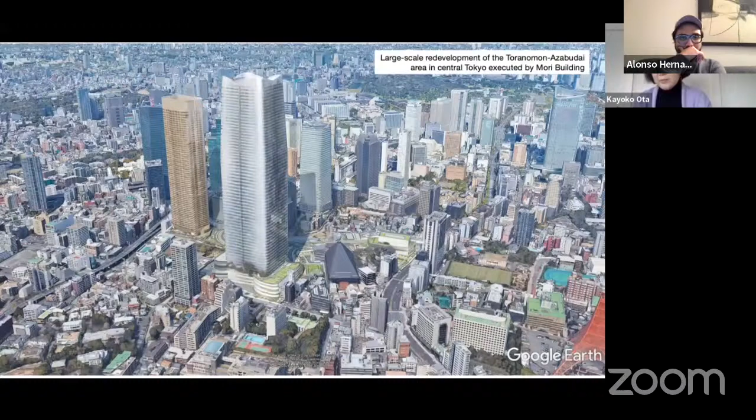Since around the time of the bubble economy in the late 1980s to the 1990s, urban planning and development has increasingly been delegated by the government to private developers. And now the market for urban development is largely dominated by a handful of developers.

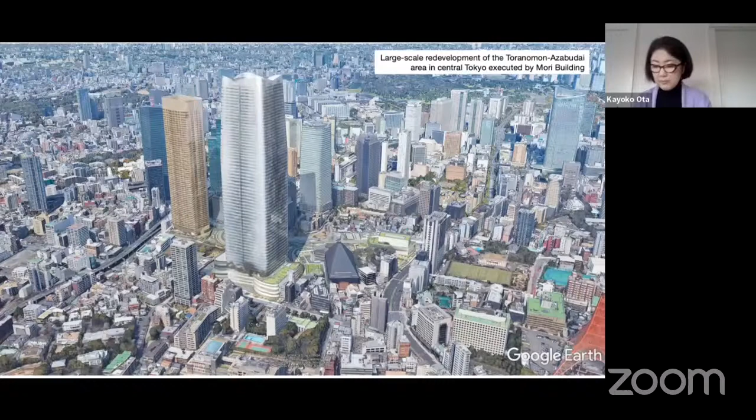The situation in the post-war period, some 60 years ago, was different. Young architects at the time, like Kiyonori Kikutake, as you're looking at his work back in 1958, asserted their own vision for things to come, addressing the whole society as a member of Metabolism. This is another member of Metabolism.

This is another member of Metabolism, Kisho Kurokawa, who made a proposal for Agricultural City. Although it looks like a visionary project, it was a serious attempt to regenerate his hometown in Aichi, which is in between Tokyo and Osaka, after the whole village was damaged by a major typhoon in 1959.

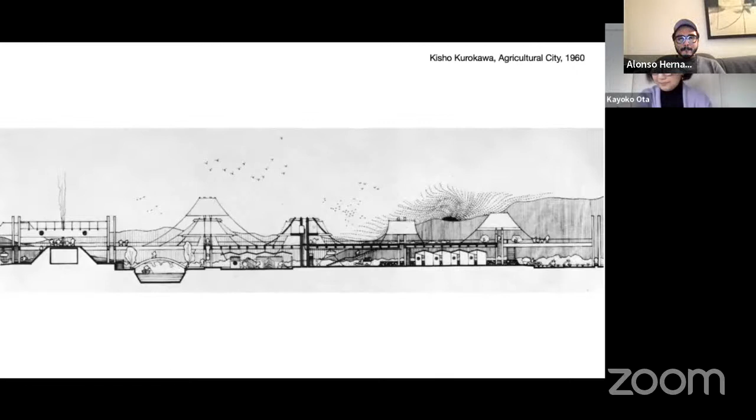Or Kenzo Tange presented a future plan for Tokyo, on how the city, in the imminent crisis of population burst, could change and reform itself. It was presented to the public, and it was a comprehensive plan based on thorough research.

Some of the architects did manage to embody their vision or visionary plans, like Kikutake or Tange, but their achievements were eventually replaced with generic buildings, designed by large corporate firms as products or commodities. These are the result of calculation based on market formula, having very little to do with the specificity of the context or personal vision.

Typically, construction and especially urban development has been a major subject of this economic operation, which, for example, inflated the scale and height of buildings.

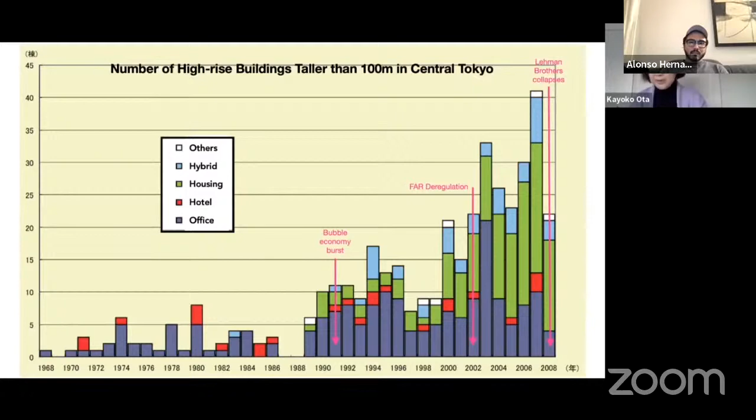For Tokyo, the national and local governments together have been encouraging renewal of several nodes into internationally competitive urban hubs, as marked with purple on this map.

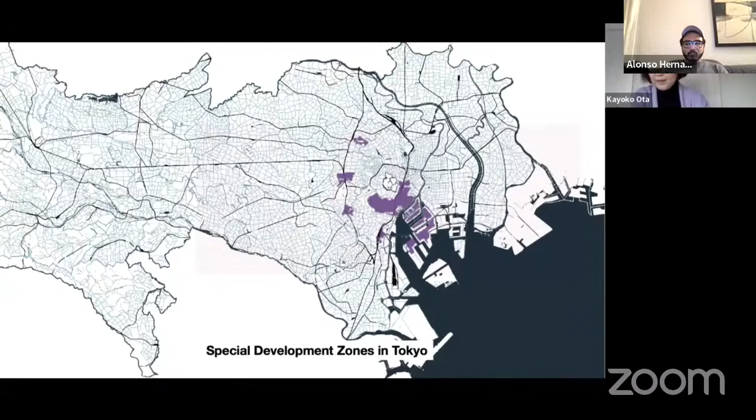But at the same time, the old urban fabric, marked in red, consistently surrounds the purple area on the periphery of the urban center. And this old urban fabric is facing an increasing risk of deterioration due to the physical weakness and density of timber structures, mostly built right after the Second World War, which is now being exacerbated by shrinking and aging of the population.

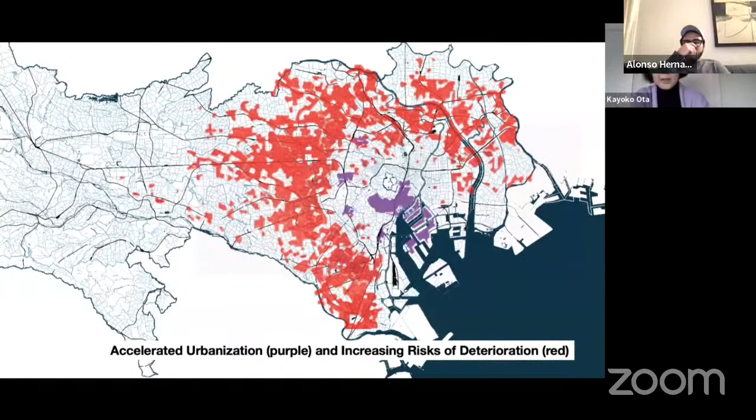Back in the days, it was for these areas that architects with small practice designed a house as an alternative model for living in a city. They also strived to make it an artistic representation of their intellectual thoughts.

This is a house designed by Toyo Ito, who was also very much influenced at the time by Kazuo Shinohara, as much as Sejima and Nishizawa. Such experimental works certainly push the limit of architecture, but whether or not they have much concern with how their work would or should relate with the surrounding condition is a separate issue.

Into the 21st century, there was a wake-up call. In the never-ending economic stagnation since the bubble burst, we were forced to face the demographic phenomena and its consequences and change our values. It was useless to think of the future in the way we did at the time of the Expo 70.

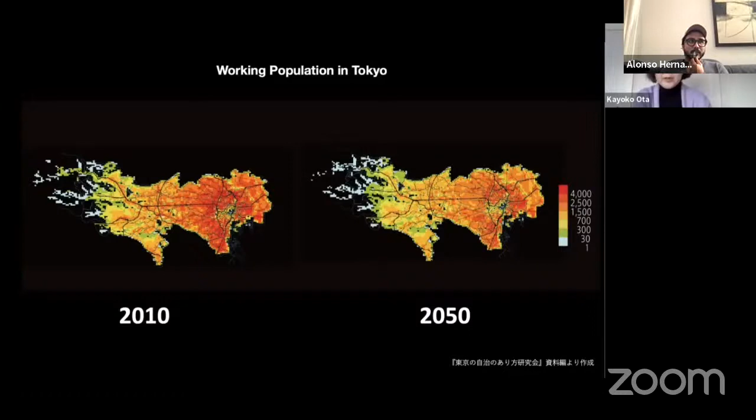The population of Tokyo is expected to start shrinking in 2025, and we also see less working population due to the population aging. We are also expecting the increase of old people living alone. And the number of houses being abandoned is increasing. This will be the game changer for housing design.

Now, many architects say that they had to redefine their profession after the great earthquake of Tohoku in 2011. This seemed to be a phenomenon specific to Japan, but as we see global warming causing unforeseen disasters all over the world, it no longer seems a local issue, nor the population aging or shrinking.

Having a mind shaken by the 2011 disaster, the architect's interest, especially in the younger generation, is shifting from creating works as author to engaging with society.

Here are some of the renovation works by the younger generation, which are designed as a pilot project or instigator of regenerating the neighborhood. Yoshihiko Oshima, who is the second person from the right on the left picture, leading a studio called Blue Studio, became a role model of young architects by bringing many projects of regenerating shrinking neighborhoods to a success. This family restaurant on the right...

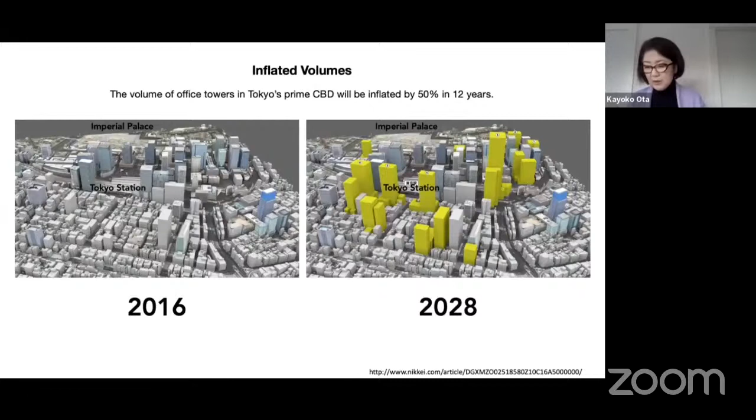Meanwhile, in the central part of Tokyo, like this place around the central station, which is a prime CBD, further inflation of space is taking place right now. So the development is very much in the hands of major developers, general contractors, and corporate design firms, which means that architects with small practice are almost completely excluded from the scene.

So now we have a situation where the small design practice is more and more marginalized in the market of urban development, while the profession's concern is leaning towards social challenges and engagement, which is great. But as a result, architectural design is becoming more pedestrian, mainly concerned with managing solutions in predictable manners. And I think this is a problem as well.

What I want to show you today is that new behaviors are emerging among architects, which might be a sign of turning point for the architecture profession altogether. They have high concern for social interaction, while also trying to expand the repertoire of architecture itself in a different way than their older generations did. The new breed treat architecture as a strategic urban intervention, although the result may seem more subtle.

Shibuya is one of several urban nodes of Tokyo and is now going under a massive redevelopment to become a business and entertainment hub. The complex project overarches several skyscrapers, a public plaza, pedestrian connectors, and so on, executed by a consortium led by a railway company, which also acts as the developer.

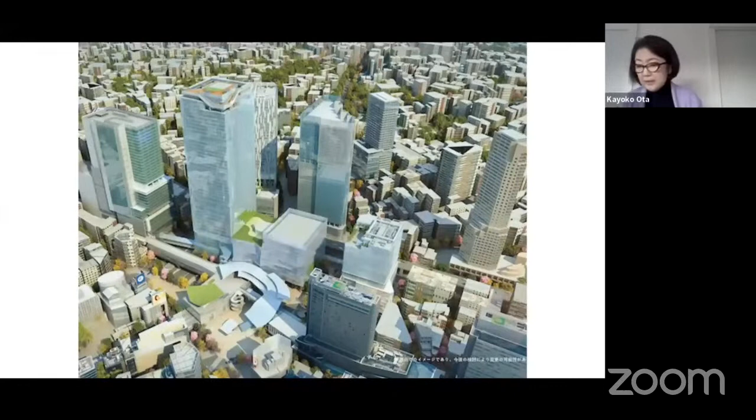These high-rise buildings look quite generic, of course, and the building that I'm going to talk about is no exception, which is this skyscraper called Shibuya Stream.

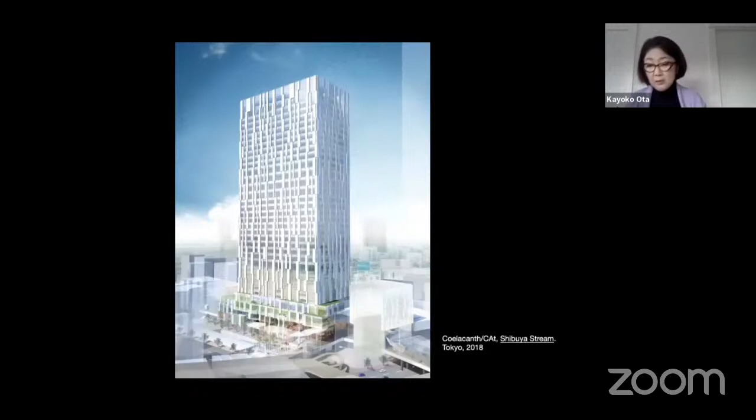And the architect studio Coelacanth made a remarkable evolution, however, inside the building. They focused their efforts on the lower portion of the building, from the ground level up to the 5th floor, because from the 6th floor up to the top of the building is entirely office floors rented out to Google Japan. And so this lower portion needed to have public passages and retail functions.

The architects managed to evolve the functionality of a skyscraper in two ways. One is that they enhanced the public use of the privately owned territory with a network of large voids penetrating through the lower portion in all directions. This network lets visitors coming from various directions for various purposes mix. This was done at the expense of sacrificing retail rent, but the client took a long-term evaluation of profit return. The second achievement is that they kept the end of all the void channels open, allowing users to have direct contact with the air and view outside.

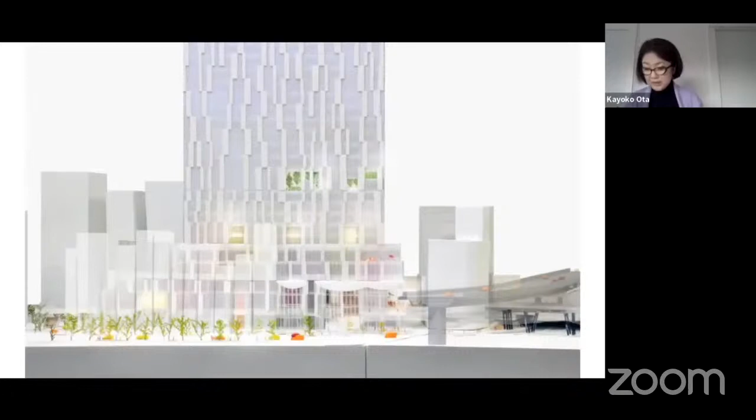Let's take a closer look. The lower portion of the skyscraper works as a connector of diverse urban elements surrounding the building: a major train station, a highway, a very busy urban road, and the canal. People enter the building and walk through it for various destinations, to be mixed in a dynamic urban space inside the skyscraper.

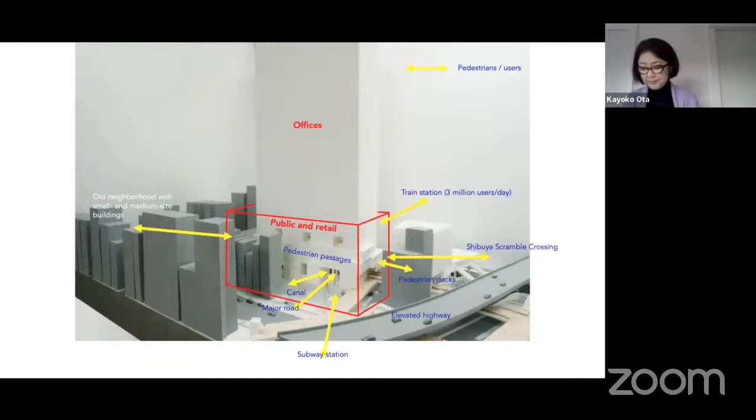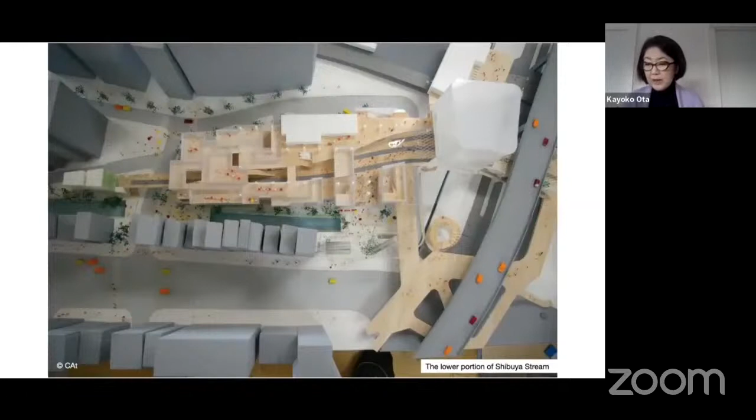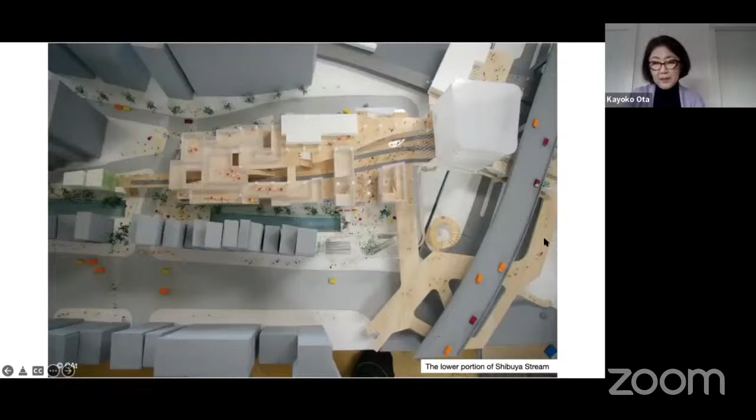You're now looking at the model of the lower portion of the building with the higher portion lifted up. You see a network of passages, hollow throughout. Here you see the elevated highway, a network of pedestrian deck which spreads under the highway, and then underneath this pedestrian network is the very busy urban road.

And this is the site, along a very tiny canal, which used to be buried under the ground to make more space for the last Olympics in 1964. On the other side of this site is the major station of Shibuya.

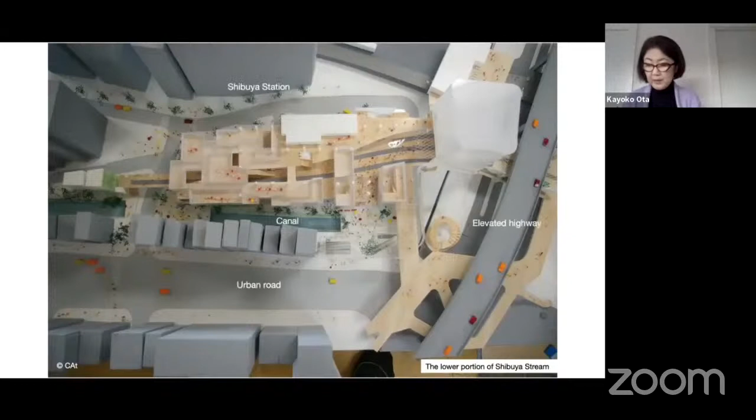This is the ground level and the canal, which was resuscitated for the development. And this is the very busy urban road. There is also a connection from the building to the subway station underneath with this urban connector, which the architects also designed.

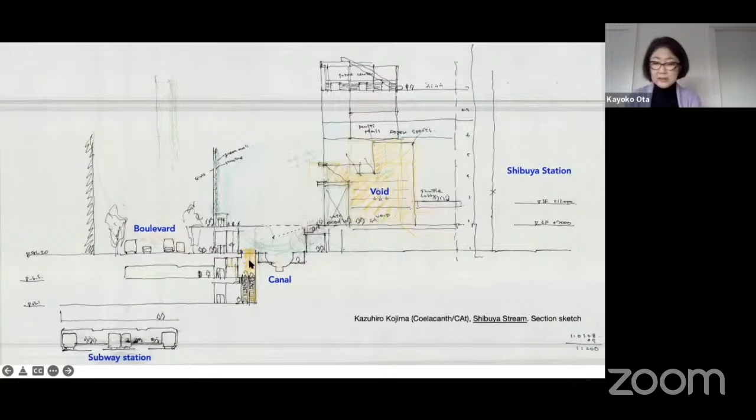So this is the outcome. The architects took advantage of the height differences of the surrounding elements on the site, which is at the very bottom of a valley—this geographic condition.

This is a model of holes made by the architect. It's a channel of voluminous voids which penetrates through the lower portion of the building. The void with the largest opening here works as the main entry to the building, which has no facade nor doors. An entire void network is open to the outside 24/7, as I mentioned.

So this is the big entry to the building, and there's no facade or door. And this is the large staircase. They also made a pedestrian road, the promenade along the canal, which were all created because it used to be occupied by an older building before.

By now, you must be wondering how a small architect studio like Coelacanth could do this all. They were able to join this project with the condition that they're assisted by a large design firm and work with urban planners and civil engineers outside through the entire process.

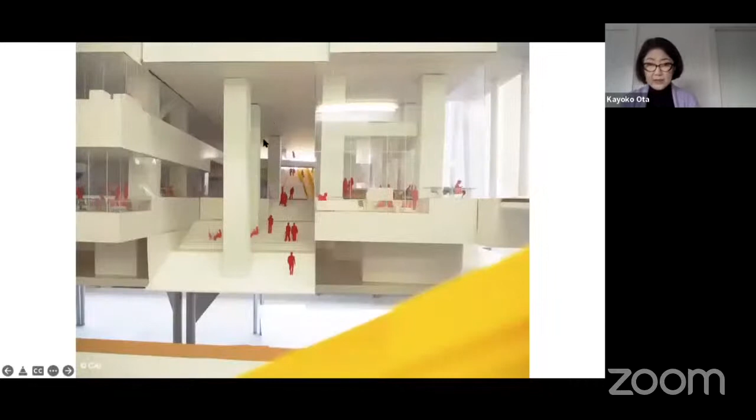One of the breakthroughs achieved by the team was the creation of this big staircase, made in a void, where they could get rid of large structural columns. As you can see here, these columns were very much there in the early model of the project. But thanks to intense negotiation and discussion with urban planners, they succeeded in getting rid of them, so that the void space can really function as a public gathering place.

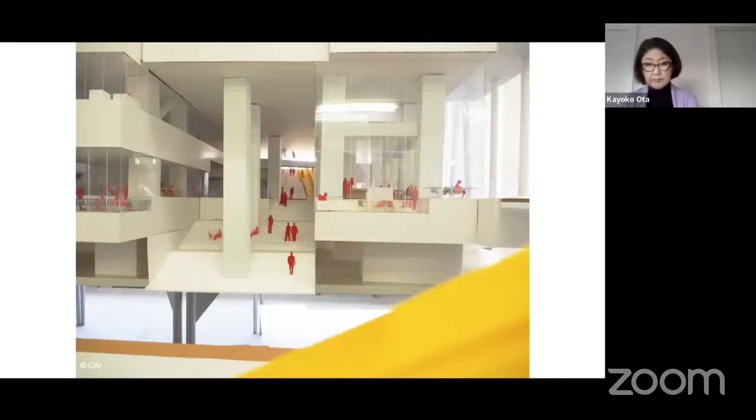The big staircases were working well as public space, like this one, until the outbreak of the pandemic. This space, and also the space in front, are occasionally used for public events, also now.

Now, ascending the stairway, you land on the main passage on the 3rd level. So now I'm going to talk about this main passage on the 3rd level. It's a big tunnel penetrating the long side of the building and stretching its arms in all directions on two levels. We are now on the main passage in the void channel. On a sunny day, it's quite bright here, feeling almost like being outside.

Wind and rain might blow in too, which is also nice. And escalators fly through large holes punched in the upper floors, like this, which allow both physical and visual interactions of various people: office workers, commuters, shoppers, hotel guests, theater goers, tourists, and people just hanging out, of course.

And maybe some of you think that, well, this reminds of a much earlier project by OMA, which was for the Euralille, I think, and also maybe a little bit like the National Library for Paris. But also the architects were very much influenced by Hiroshi Hara, who since the 1960s established the theory of holes or hollowness.

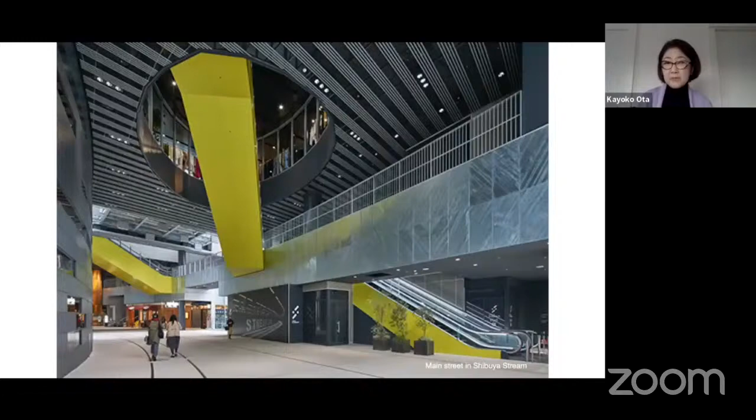Now, some part of the main passage has multiple floors, keeping the old railway track as a memory of the place, which are these metal lines going through the floor of the passage. And this main passage was carefully designed along the track line to create an informal atmosphere of an alley. So this is slightly curved instead of being straightforward, and lined with small restaurants and shops.

You see, this is the plan for the main passage, hand-drawn by the architect. The architect scripted details of how shops should be organized along the curved track line. They laid things out in such a way to give a less controlled feel and more sense of intimacy. So they encouraged the restaurants to spill out more and more into the main passage. And of course, someone had to negotiate with the authority to change the regulation.

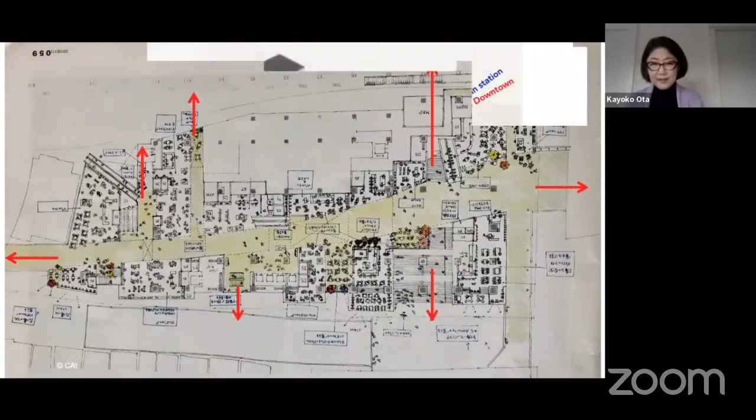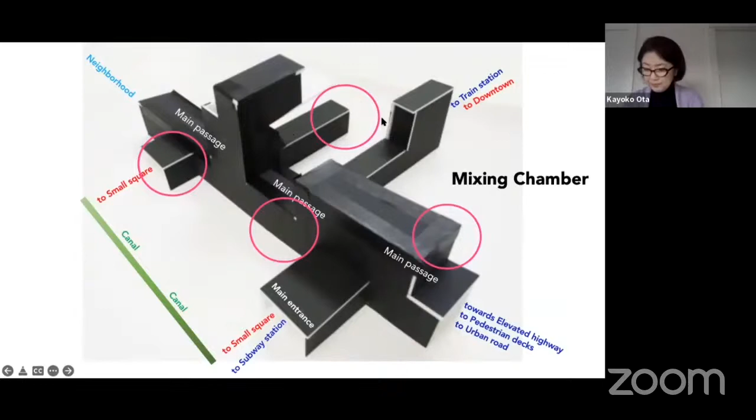While saving some space in between restaurants. For example, here, you see this little alley, the narrower void channel, where anyone can hide or rest as if in a backstreet. You can also have direct contact with the outside air here. So these are also the efforts of the architects to undo the sterile universal space in a skyscraper and create more sense of belonging for users.

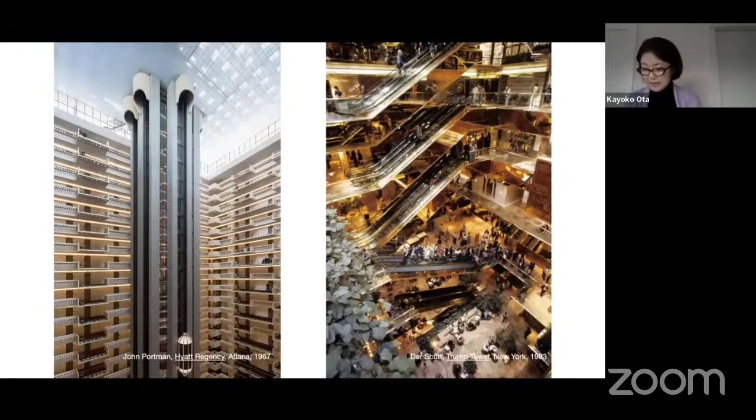I think that Shibuya Stream has presented an alternative model of skyscraper, addressing the issues of isolation, detachedness from the outdoor air, and consumer-oriented efficiency at the expense of spontaneous interaction or flexibility. Also, for the first time, the project proved that a small design practice was able to design a skyscraper thanks to the courageous attempt by the project's advisors.

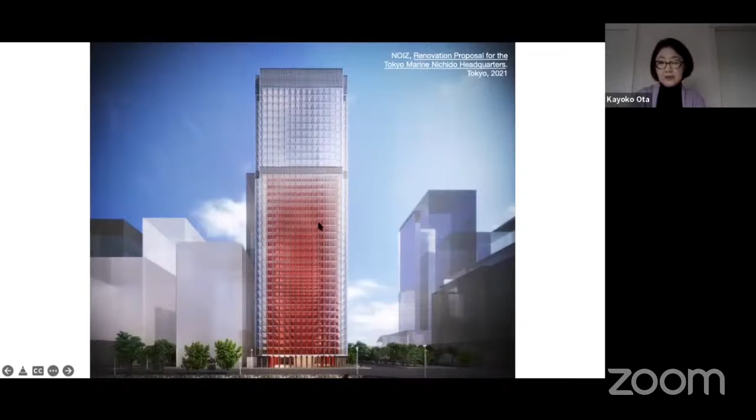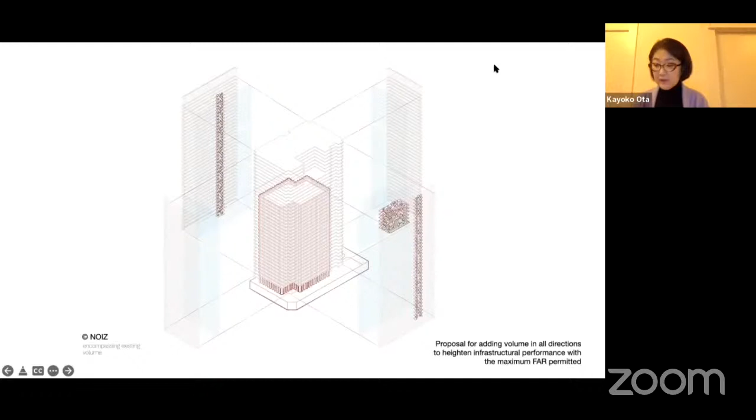And Toyoda's proposal was to envelop the existing building with a very high performance glass tower, which is transparent, like this one, so that the volume is inflated in all directions, like this drawing shows, on the four sides, but also above the building. So with the inflation of volume, they think they can meet the owner's demand to increase the space necessary, while allowing them to provide a number of common spaces for leisure and exchange, which are exposed to the outside.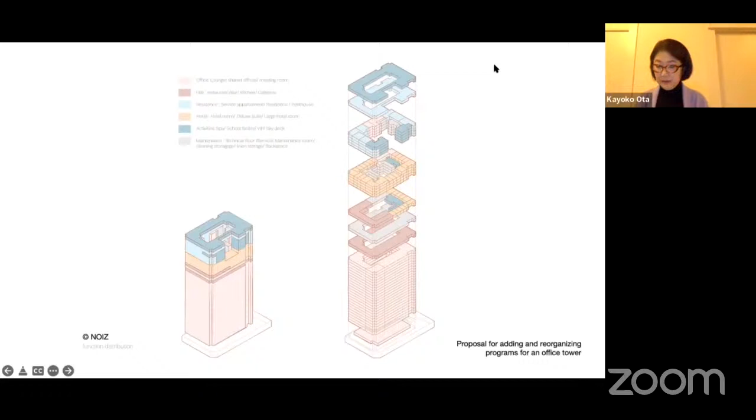Also, the proposed programs are more mixed than in regular office towers today, and are organized to make the building more resilient to change according to social demands, so that it can function as an urban infrastructure. In fact, the point of this project is not so much about preserving an old masterpiece, but in my view, it's really about the architect's gesture.

Stepping out of the professional regime or market regime, Toyoda attempted to make a public appeal of an architectural vision, which fosters a new potential for society at large. Such an action is unprecedented since the Metabolism time, but this time not just as a visionary image, but as something realistic and adaptable right away, thanks to the architect's thorough research and inventive thinking.

Now, I want to talk about the third architect who is addressing the typical condition of living in Tokyo, where more social interaction is needed in the increasingly isolated and shrinking neighborhood. The dilemma is that while having a high risk of damage by natural disasters such as fire, earthquake, flood, or typhoon, these areas are where people still keep traditional ways of living, which are more informal and pleasurable, and also shared memories.

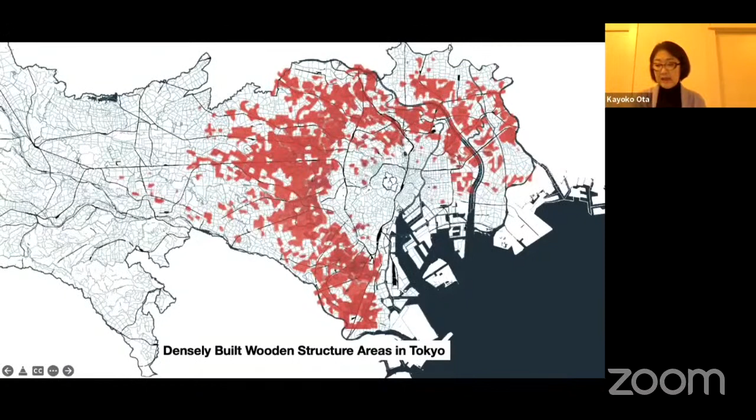For the architect Erika Nakagawa, the primary task of an architect was to think of how architecture relates with the surrounding condition, how the building helps the dweller communicate with the outside. She clearly bid farewell to the traditional school of architecture, which makes an independent work based on its own philosophy.

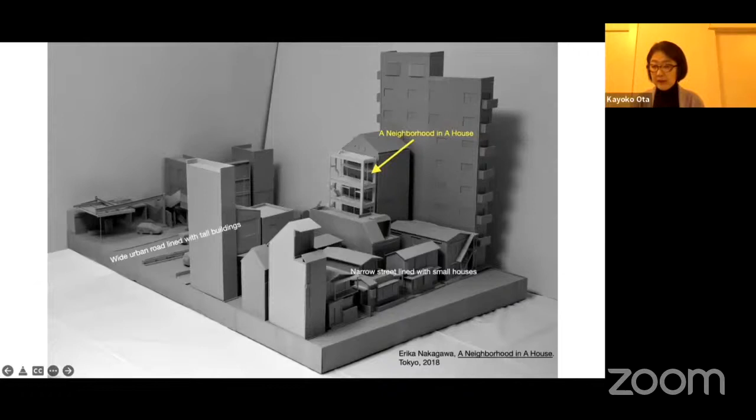The work I'm going to talk about is a tiny apartment named A Neighborhood in a House, with the footprint of 19 square meters only. The site is in a congested vernacular neighborhood. With such a small area, there is really not much you can do but follow time-tested conventions. With this project, Nakagawa chose to experiment redefining the architectural elements, especially the exterior facade, exterior surface, which is designed to enhance interaction with the outside.

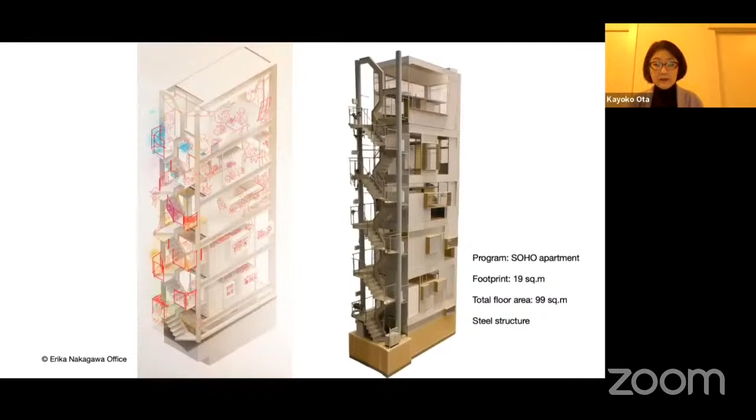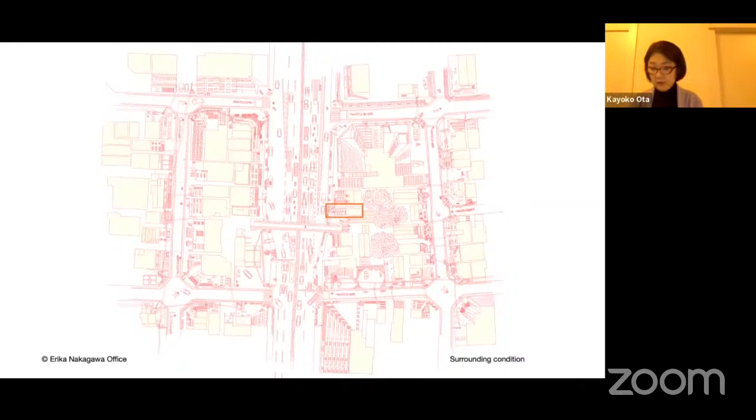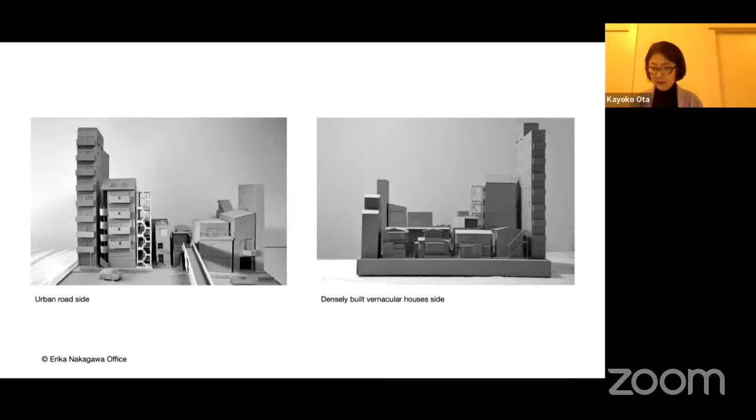The houses in older neighborhoods have various extrusions and often mechanical or utility elements attached to the exterior surface, such as drainage pipes, gas meter boxes, ventilation ducts, and other outdoor equipment. So pipes and mechanical devices are usually considered as eyesores, but Nakagawa chose to appropriate all of these things together to her apartment project as a means of communicating the life inside to the outside.

She incorporates pipes, meter boxes, and bay windows into the facade as part of the design. I should note that these are not a stylistic expression like the high-tech architecture in the 1980s, for example. On the contrary, it's a result of redefining the building facade in a larger context of the neighborhood. Today, all types of housing are becoming containers completely separated from the outside, and I see that it's a remedy for recovering ties with the world around the house.

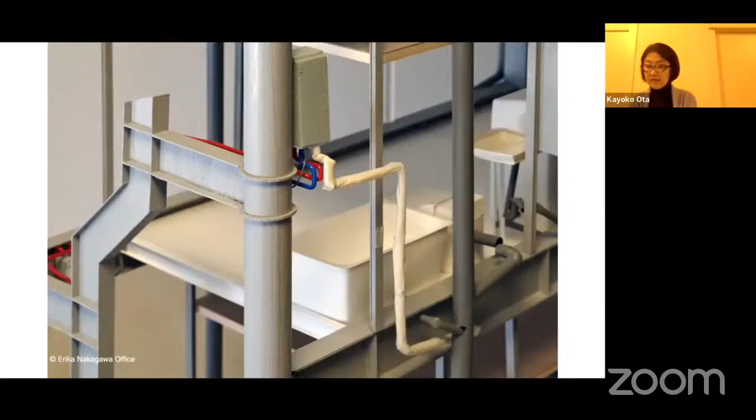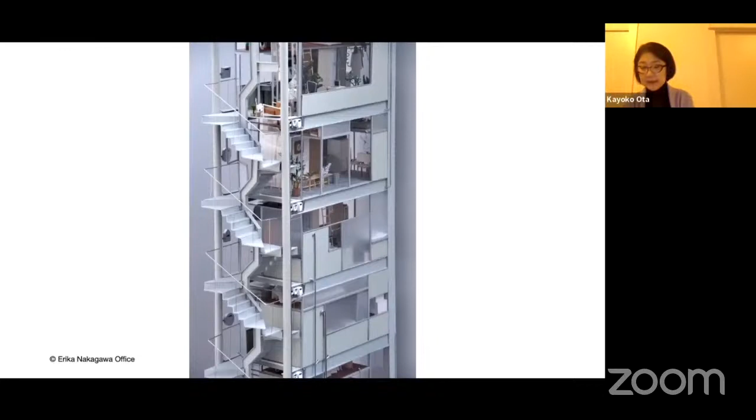As an interface between residents and neighborhood, she also elaborated on the design of the external staircases, which are mandated for small buildings for emergency, but these are rarely used in reality. She wanted these staircases to work as an extension of an alley or as a tiny garden shared among the neighborhood. All of the peripheral space in and around the flat of each floor is designed as a medium for interacting with the outside, visually and physically.

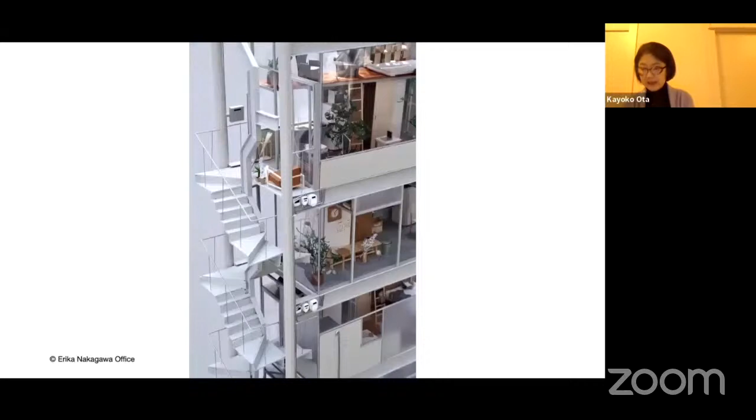The landings of the staircases are designed as an extension of each flat, which enables the resident to have a bit more space and air, enjoy views, and personalize the space for utility or comfort. This collage is a sort of prescription by the architect to the dwellers, showing how they can enjoy living in this apartment in every little corner.

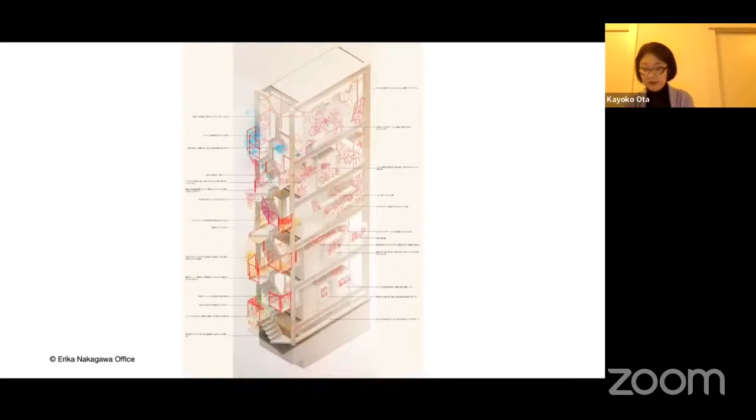Today, large cities are increasingly driven by the market economy, which ended up excluding architects who think and create individually. The three architects that I talked about today are suggesting a new direction for architects by recovering the power to invent and aggressively engage with the social reality of now. I'm hoping that the voices of these people and their contemporaries get together and reach the territories that have become off-limits to innovative architectural thinking.